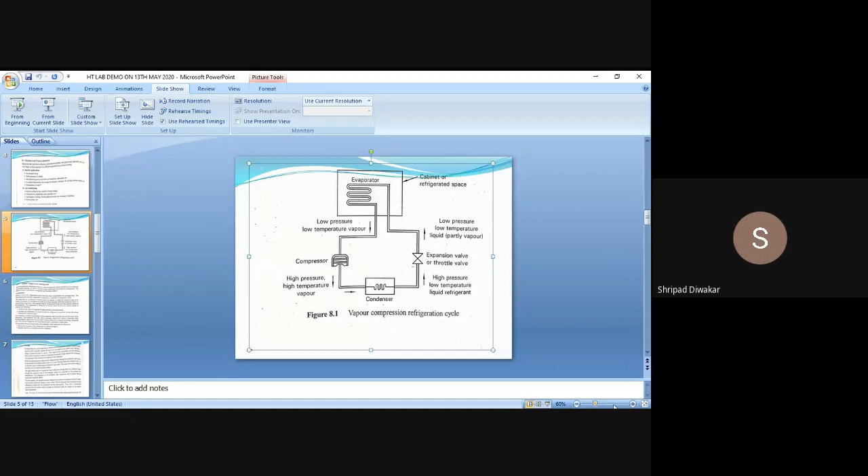Before that, I'll give some brief introduction about the refrigeration cycle. Refrigeration is the process of maintaining the temperature of the system below the atmospheric temperature. You achieve that by continuously extracting heat from the system and maintaining that temperature within the system itself. That is called refrigeration — the process of reducing temperature below the atmospheric temperature.

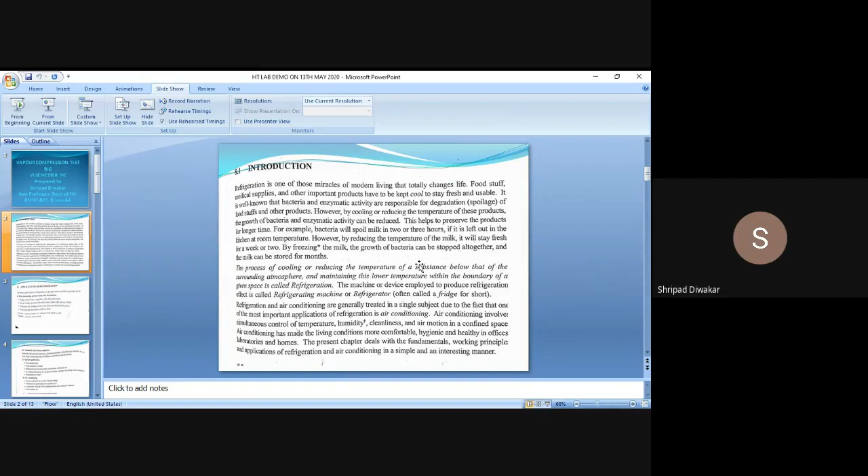Refrigeration plays a very important role in all aspects of our life, like storage of raw fruits, vegetables, fish, everything. We use refrigeration for storage of dairy products, production and cooling of fruit juices, and processing and distribution of frozen food. These are a few applications of refrigeration.

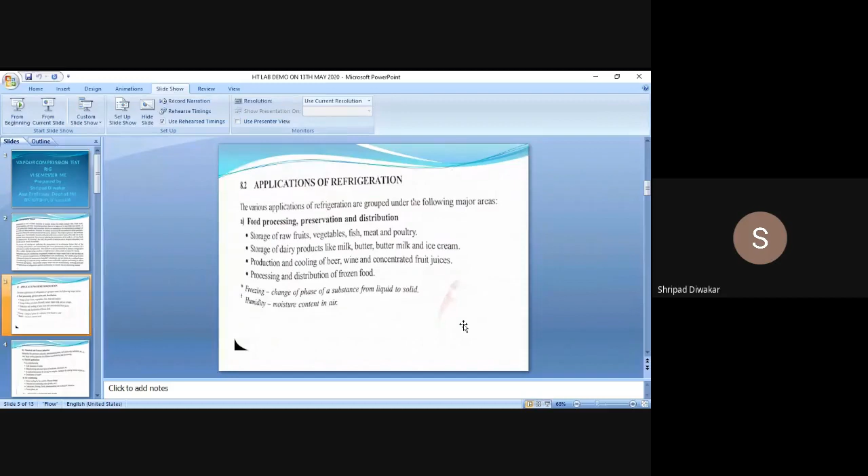Before going to the actual experiment, I'm going to explain the parts of the vapor compression refrigeration system. Once you understand this system, it is very easy to conduct one more experiment, that is air conditioning.

Air conditioning is also a part of the refrigeration system. The difference between refrigeration and air conditioning is that in refrigeration, we reduce the temperature below the atmospheric temperature. On the other hand, in air conditioning, not only controlling the temperature, but meantime we can control the humidity, that is moisture content, cleanliness of air, and flow of air within the confined space. These are the additional things that come with air conditioning. That is the difference between refrigeration and air conditioning.

In case of air refrigeration, we are only reducing the temperature below the surrounding temperature. In air conditioning, not only controlling the temperature according to our requirements, we can also control the humidity, that is moisture content, cleanliness of air, and the particular flow of air within the confined space.

Now what you are seeing on the screen is the vapor compression refrigeration system. A vapor compression refrigeration system mainly consists of four parts. You remember, one is the evaporator, which you can see on the top. Next we have the compressor, next the condenser, and the fourth one is the expansion valve or throttle valve. So first one is the evaporator.

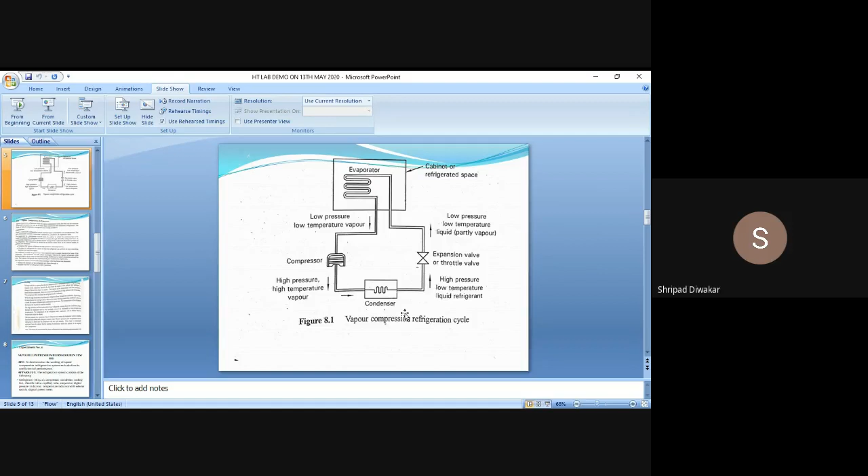Now this is actual experiment number 11, serial number in your lab manual. Our aim is to find out the COP, that is the coefficient of performance of the refrigeration system. We have already studied the efficiency of any engine, which is net work done divided by heat supplied. In case of refrigeration, we express it in terms of COP, coefficient of performance. The formula for coefficient of performance is Q divided by W.

That is, how much amount of heat is extracted from the system compared to the work required to do the extraction. That is the formula for COP, Q divided by W, the amount of heat extracted to the amount of work done to extract the heat. That is our aim, to find out using the refrigeration test rig the coefficient of performance of the given refrigeration system.

Now the apparatus required consists of the following: refrigerant, compressor, condenser. These are the additional devices: cooling fan, throttle valve, capillary tube, evaporator, digital pressure indicator to indicate the pressure of the system, and temperature indicator to show how much temperature has changed. These are the apparatus used in our lab: refrigerant, compressor, condenser, capillary tube.

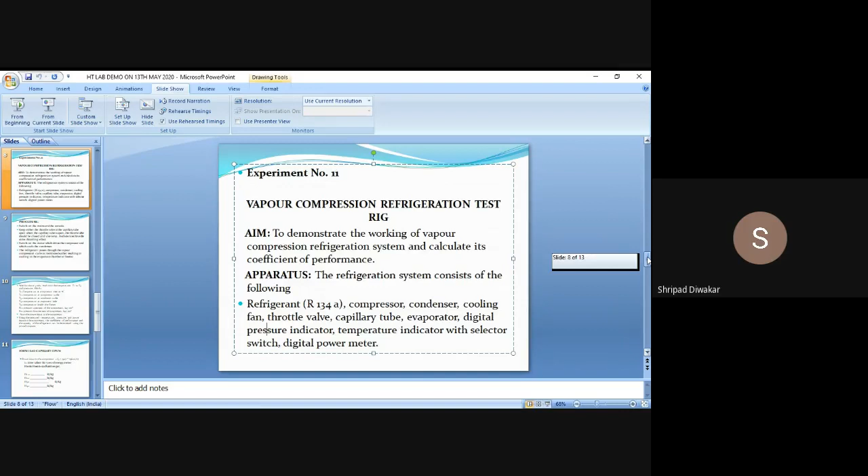And a pressure indicator to indicate the pressure of the refrigerant, and a temperature indicator. These are the apparatus required in the system. Next, I'm going to explain the procedure.

First, switch on the mains and the console. Keep either the throttle valve or capillary tube open. When the capillary tube is open, the throttle valve should be closed, and vice versa. That's why we're going to conduct the experiment two times.

First time we're going to open the capillary tube and close the throttle valve, and in the next set we're going to open the throttle valve and close the capillary tube. The function is the same, a throttling process, meaning an expansion process, reducing the pressure to the practical limit. Both devices have the same throttling effect.

First, switch on the main, and either use the throttle valve or the capillary tube, then you can change the set of readings. Switch on the motor to drive the compressor. The motor is required to drive the compressor and cool the condenser.

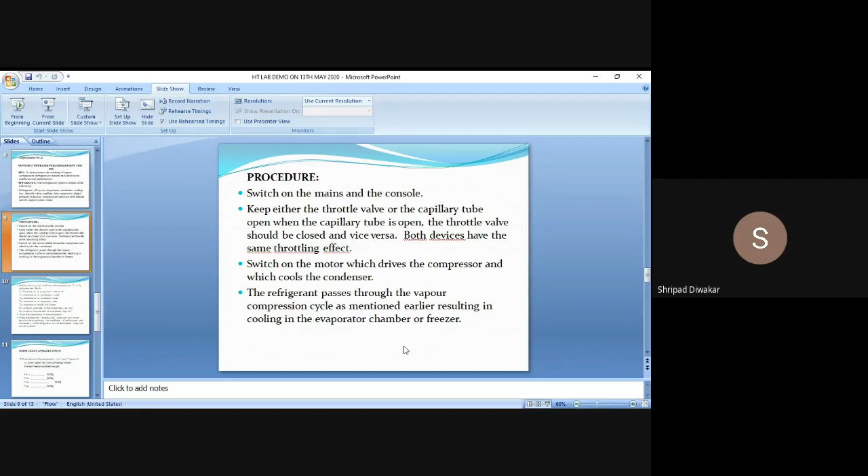As you switch on the motor, the cycle starts. The refrigerant passes through the vapor compression cycle, as I explained how the refrigerant flows in different parts, resulting in cooling. Next, you have to wait for 5 minutes and note down the temperature.

There are five temperature readings in the knob: T1, T2, T3, T4, and T5. In the experimental setup there are five readings, T1 to T5. T1 indicates the temperature at the compressor inlet, how much temperature is there before entering the compressor. T2 is the temperature at the compressor outlet.

T3 is temperature at the condenser. T4 is temperature at the evaporator inlet. T5 is the temperature inside the freezer. These are the five temperatures, all in degrees Celsius. And we have two pressure readings, P1 and P2.

P1 is the pressure at the compressor in terms of kg force per centimeter square. Remember, whatever readings we get in our lab are in terms of kg force per centimeter square. After that, using a conversion factor, we convert this kg force per centimeter square into bar or kilopascal, etc. Next, you have to note down the power input to the compressor.

How much power is required to run the compressor? You have to note down all this, mainly temperature is most important. Pressures you have to remember and note down. These are the readings you are going to take: T1 to T5, and P1 and P2 readings.

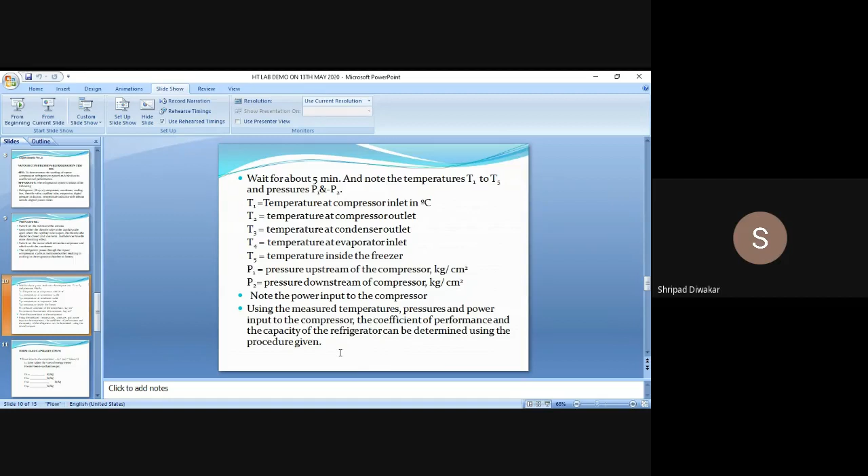Once using the measured temperature, pressure, and power input to the compressor, the coefficient of performance and capacity of the refrigeration can be determined. So you're going to take totally seven readings: T1 to T5, P1, and P2. By knowing the temperatures, pressures, and power input to the compressor, the COP of refrigeration can be calculated.

Now, before doing the experiment, you should know how to read the p-H chart and how to locate the values on it. That is most important. Once you understand how to take the values, then only you can calculate the coefficient of performance. There are four values you have to calculate.

I'll show one video on how to take the H1, H2, H3, and H4 readings. H1 is enthalpy, and all the values we get from the Freon 12 chart. If you are using Freon 22 as a refrigerant, then we have a different chart, the Freon 22 chart. So depending upon the refrigerant used in the laboratory, we have to refer to that chart, the Freon 12 chart, for H1, H2, H3, and H4.

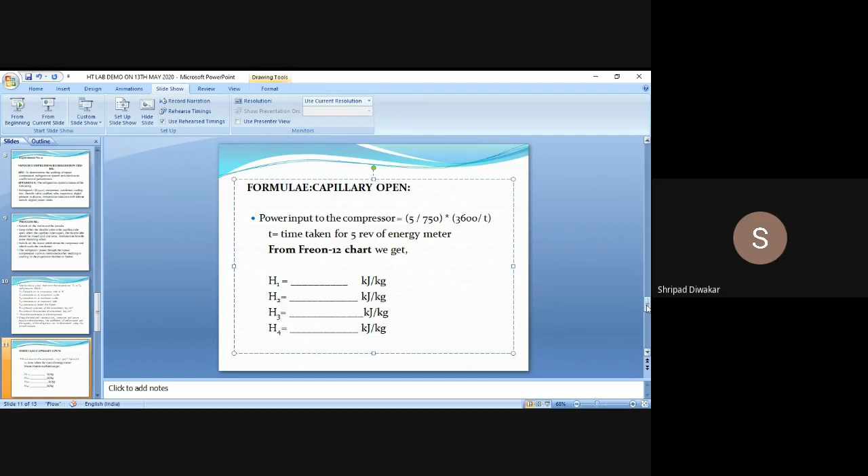These are the four values you are going to get. The formula is: coefficient of performance equals H1 minus H4, divided by H2 minus H1. And HP per ton of refrigeration is given by the power input to the compressor, the reading you found, divided by 3.5, since 1 ton of refrigeration equals 3.5 kilowatts. So before that, you should know how to calculate H1, H2, H3, and H4.

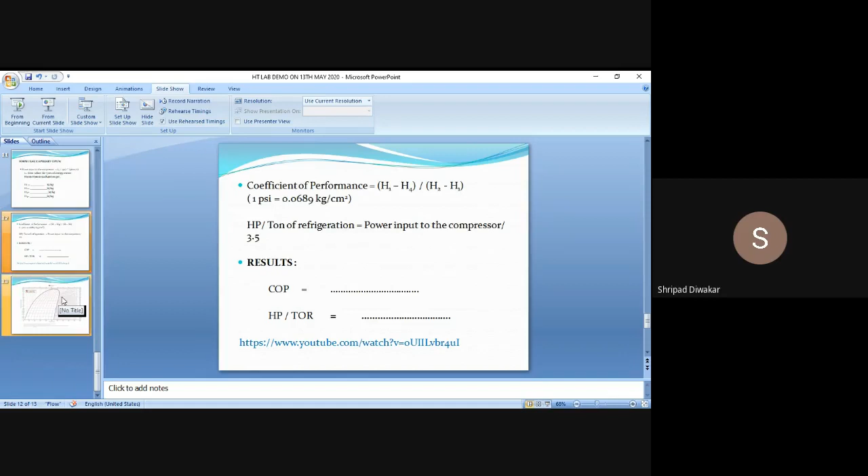I'll show the nature of the diagram. This is the nature of the diagram. Now I'll show one video on how to take the values of H1, H2, H3, and H4, and how to calculate the COP.

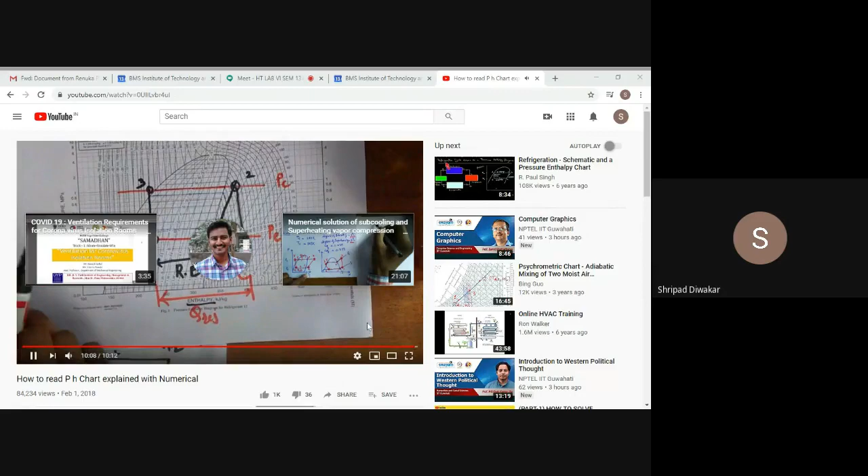Okay, hope you understood how to see the chart, the P-h chart is most important. Have you seen the chart? Tell me. I couldn't understand anything, sir. At least you have seen the chart, the nature of the chart? I only saw the chart, so if you only show me the chart I recognize it, but I can't do anything in the exam with this, sir. What you shown on the picture, I've seen, sir, that's all, one calculator and picture. Okay, just a minute.

Now I'll explain what is the actual equipment in our lab. This is the layout of your VCR.

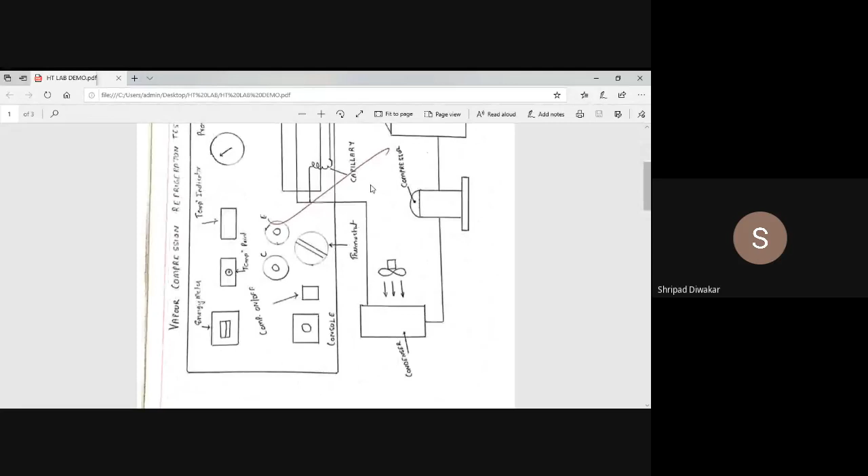In the panel we are having pressure gauges and temperature indicators to show the pressure and temperature. Now I'm showing one reading. I gave different temperatures, that is T1, T2, T3, T4 and T5. You are going to take the readings P1 and P2, so 5 temperature readings and 2 pressure readings.

This one is actually conducted in your lab. These are the values when the capillary valve is open and the expansion valve is kept closed. In the second case, the expansion valve is open and the capillary valve is kept closed. So these are the 5 temperature readings and 2 pressure readings.

Now how to calculate is the most important thing. For the capillary open case, remember whatever readings we get are in terms of inch. You have to convert first into mm, then from mm into hg, and then into bar. So readings in our lab are in terms of inch.

For capillary open we get P1 as minus 5 inch. Pressure has to be expressed in bar. Convert 5 inch into mm: 5 into 25.4 equals minus 127 mm. We know 760 mm is 1 bar, so 127 mm is 0.167 bar. So all values are expressed in terms of bar.

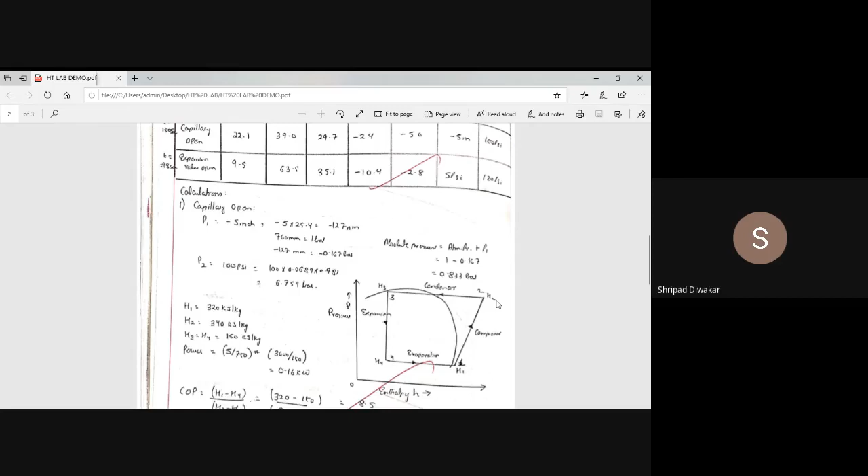After seeing this, you have to drag down. Meantime, you have to locate the temperature and pressure properly on the R12 chart. R12 is a refrigerant used in the refrigeration system. You have to refer to that chart only, then you'll get the correct answer.

By knowing the temperature and pressure, we can locate point 1, and by knowing T2 and P2, we locate point 2. This is called the entropy, the constant entropy line. You have to follow the inclined line on the P-h chart. First locating point 1 is important, then you locate point 2, following the constant entropy line. This is called isentropic compression.

Next, 2 to 3. Here you have to note down temperature 3, around 29.7 degrees. So you note down point number 3 on this curve, and then 3 and 4 are the same. This is called isenthalpic expansion. H3 and H4 are the same, but you have to locate all the points properly on the P-h diagram.

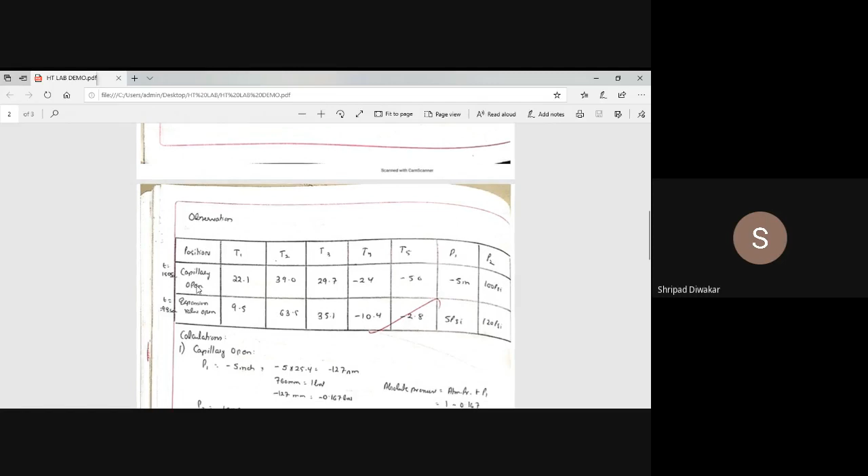One more calculation is HP by ton of refrigeration. HP means we are going to find out the power. So using the capillary setup, you note down how much power is required to run the compressor. In this case, 150 seconds is required, you note down the time 150 seconds in the first case, and you get 0.16.

Whatever COP you get is 8.5, and 0.16 kilowatt comes from: 750 energy meter constant, 5 revolutions of the energy meter, into 3600, divided by the time noted in the experiment (150), giving the time required to drive the compressor. Using this, power is 0.16 kilowatt. Just take the ratio 0.16 divided by 3.5.

That gives you how much kilowatt per ton of refrigeration is produced. Similarly, we are going to calculate for the other set of readings, whenever the expansion valve is open, giving us two readings, P1 and P2. Remember, for this second set of readings, the expansion valve is open and time required is 98 seconds to drive the compressor, with 5 temperature readings and 2 pressure readings.

In case of the expansion valve, the pressure we are getting is in PSI, pounds per square inch. You have to convert this into bar. Remember these two important conversions: first inch to mm, then mm to bar divided by 760, and pounds per square inch to bar by multiplying by 0.0689 into 0.981. This is the conversion factor you use to convert pounds per square inch.

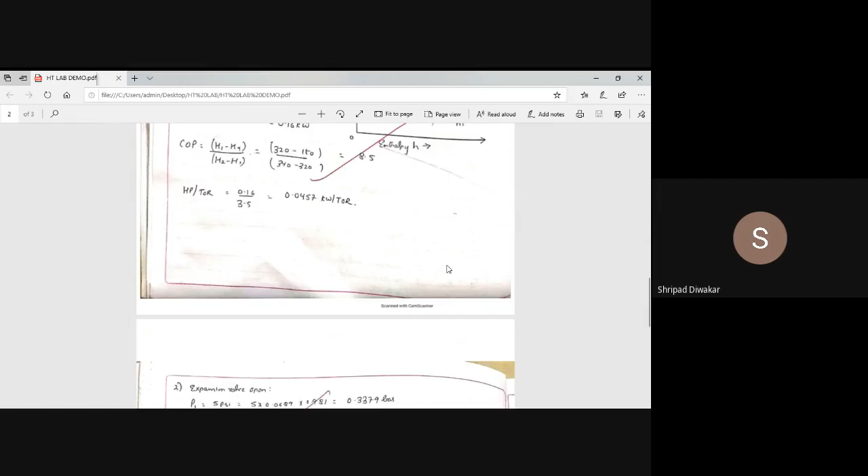P1 and P2 - how much are we getting? P1 here is 0.3379 bar and P2 is 8.111 bar. So P1 is approximately 0.33 bar and P2 is approximately 8 bar. The condenser pressure is higher than the evaporator pressure. After calculating that, the next step is the standard formula: H1 minus H4 divided by H2 minus H1.

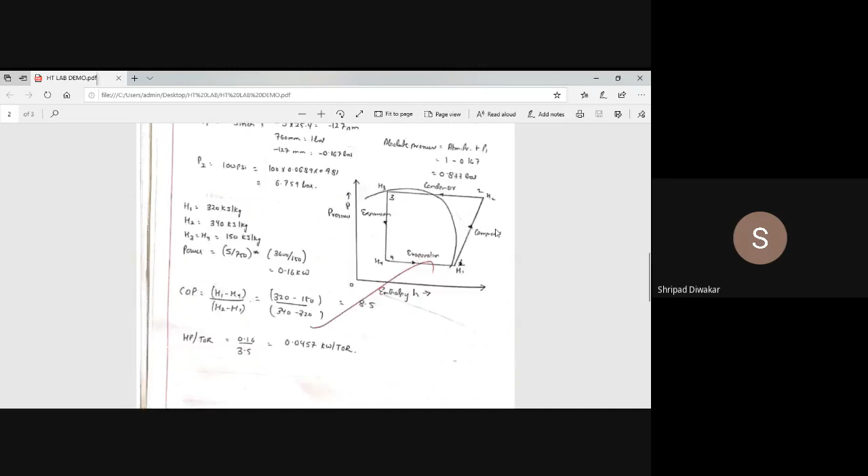Now, corresponding to 0.3379 bar and T1 - where is temperature T1? In the second case it is 9.5. Corresponding to 9.5 and this pressure, you have to look at point 1. Now take the constant entropy line - this is most important to locate point 2. What is pressure 2 now? Pressure 2 in the second case is 8 bar, and temperature 2 is 63.5 degrees Celsius. Corresponding to P2 and T2, you locate point 2.

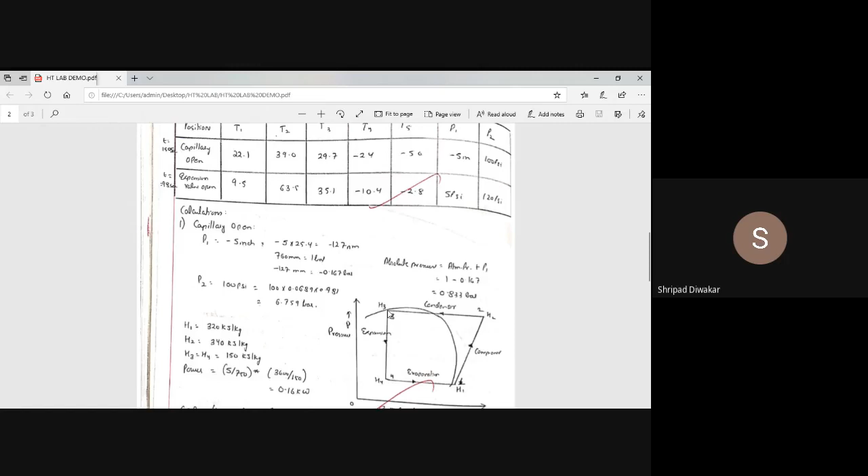Next, the third temperature is 35 degrees Celsius. Then you take the straight line and locate point 3. Then points 3 and 4 you locate to get the values of H1, H2, H3 and H4. These are the values you are going to calculate.

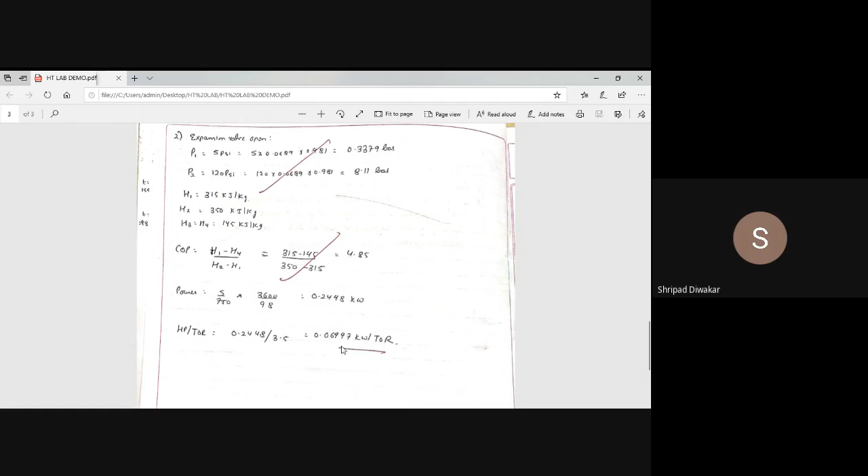Then calculate COP. How to calculate the power? 5 is the number of energy revolutions, 750 is the energy meter constant, 3600 converts into joules per second, and 98 is the seconds required to run the compressor. You get 0.2448, and in the second case COP is 4.85. So 0.2448 divided by 3.5 gives you 0.06997 kilowatt per TOR.

So today, once again, just check out the pH chart - that is the refrigeration R-12 chart. Take some value and find out, then find out the COP. Mainly you take readings in 5 minutes, but finding out H1, H3 and H2 is most important - one is evaporator temperature and one is condenser temperature.

Nihar Sai, Nihar. Yes, sir. Have you understood something? Okay. Yes, sir.

How to see the chart? You have to see the chart - this is most important. It's called a refrigeration chart. Do you know how to see this Mollier diagram? No, sir, you haven't studied that Mollier chart in thermodynamics. Okay, just spend some 5 to 10 minutes learning how to read the pH chart. Just Google it - refrigeration R-12 chart - and how to see the values of H1, H2, like that. Just type it and you'll get the information. So the formula is very simple: H1 minus H4 divided by H2 minus H1. But only the location of two points is most important, and the conversion factor is most important.